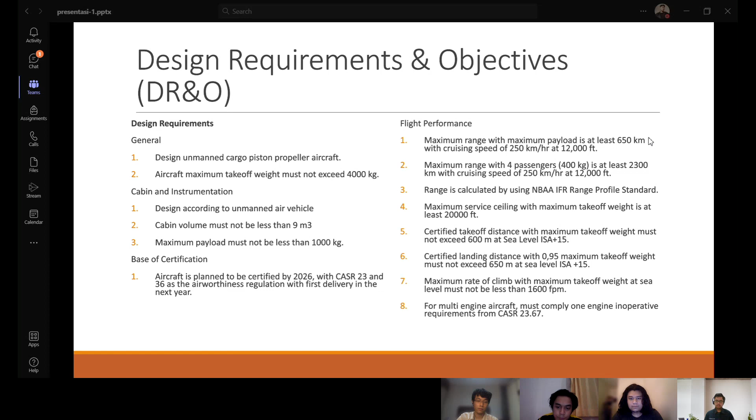It's planned to be certified by 2026, with CASR 23 and 36 as its airworthiness regulation. And on the right side of the screen, you can see several criteria for its flight performance. There's a range, a maximum service ceiling, a takeoff and landing distance, and a maximum rate of climb. And for a multi-engine aircraft, it must comply with the one engine inoperative requirement from CASR 23.67. However, it's worth noting that the aircraft that we've designed consists of one engine only. So that criteria doesn't really apply in our case.

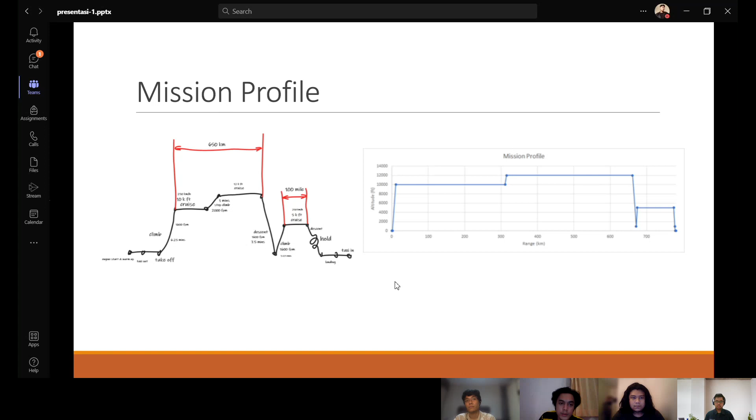So this is the mission profile, or at least one of the options. It would start to climb as soon as takeoff until it reaches 10,000 feet, and it will cruise for 250 kilometers, at which point somewhere in the middle it will start to do a step climb for a minute at 2,000 FPM, and it will then cruise again at 12,000 feet at 250 kilometers per hour, and it will start to descend at 1,600 FPM and climb again at 1,600 FPM until it will cruise at 5,000 feet, 250 kilometers per hour for around 100 miles until it descends and lands at the landing zone.

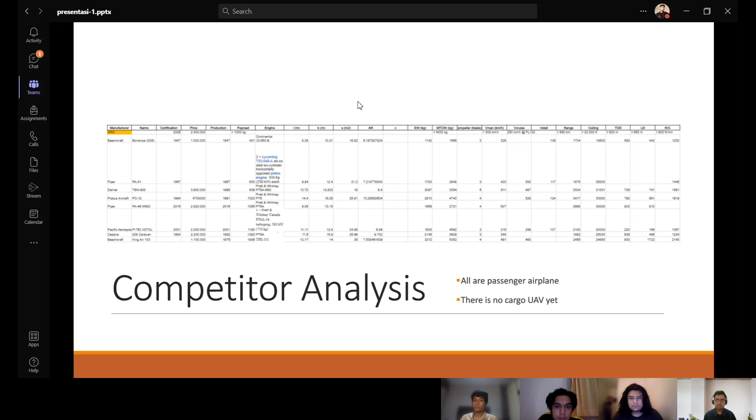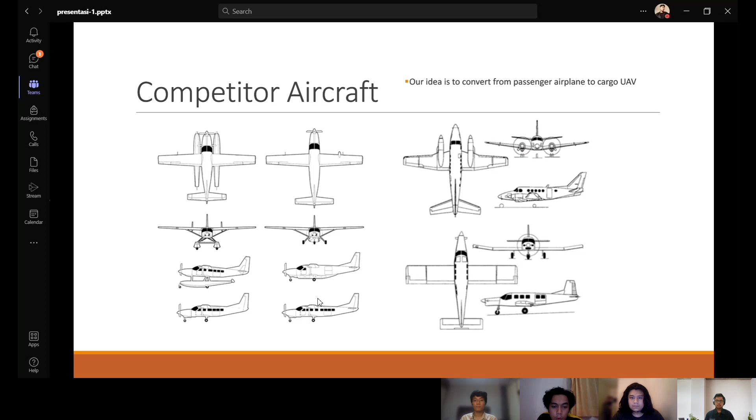These are the diagrams for the competitors, and maybe for ours there won't be any windows because there are no passengers, but this is just for your information. And for the aircraft configuration concept, Bayu can take over for me.

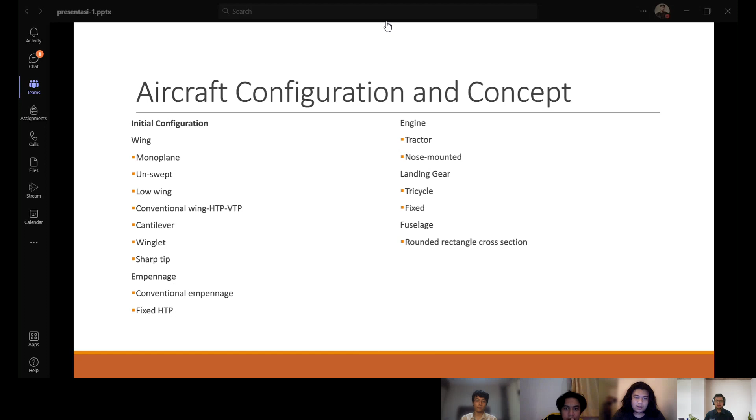Hello. Okay, for the aircraft configuration and concept, the initial configuration of our aircraft is a monoplane aircraft with an unswept wing and a low wing location. It uses a conventional wing, HTP and VTP. The wing is also cantilever. We will try to apply the use of winglets and a sharp tip. The empennage is conventional with a fixed horizontal tailplane. The engine is tractor, which means that it's in the front, and it is also nose mounted. The landing gear is tricycle and fixed. The fuselage is also rounded rectangle cross section.

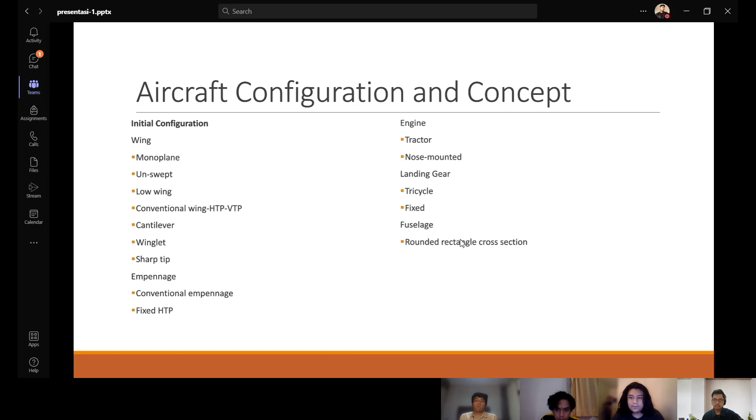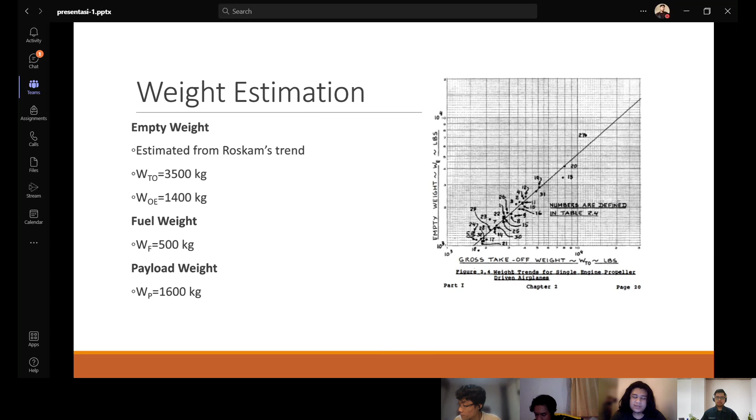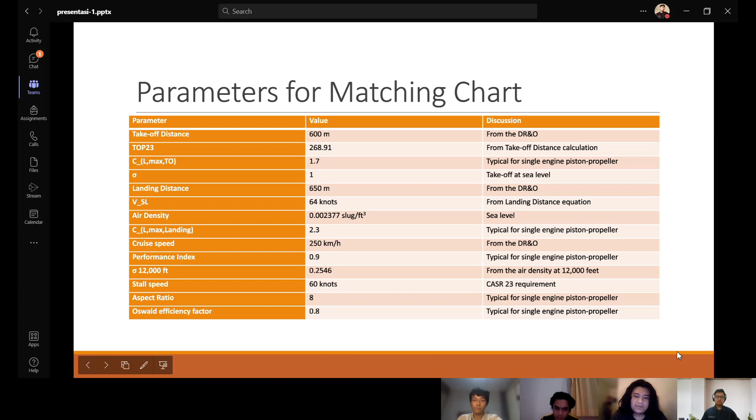And then Fahmi can continue. All right, thank you, Bayu.

So this is the result of our constructed matching chart. Based on the region that complies with the requirements, our design point will be a wing loading of 1300 Newtons per square meter and a power loading of 10 kilograms per kilowatt. This matching chart consists of takeoff constraint, landing, cruise speed, stall speed, and rate of climb. And we also input the design points of our competitors in the matching chart. Next, please.

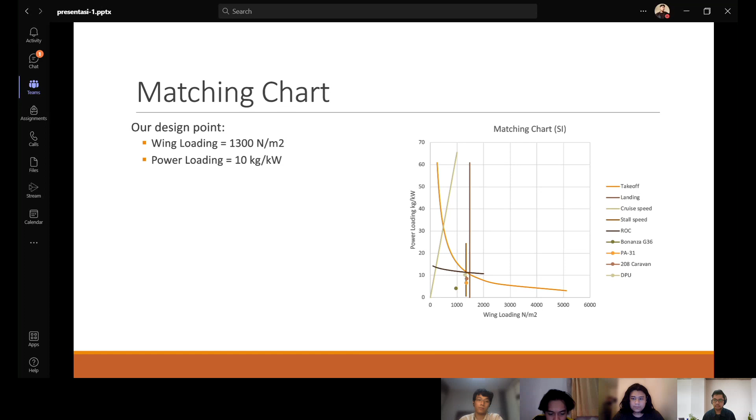These are some design parameters that we can obtain based on the matching chart estimation. We have the power loading and wing loading, CL max takeoff and CL max landing, and we can obtain the wing reference area and the installed engine power. We will discuss this in the next slide, please.

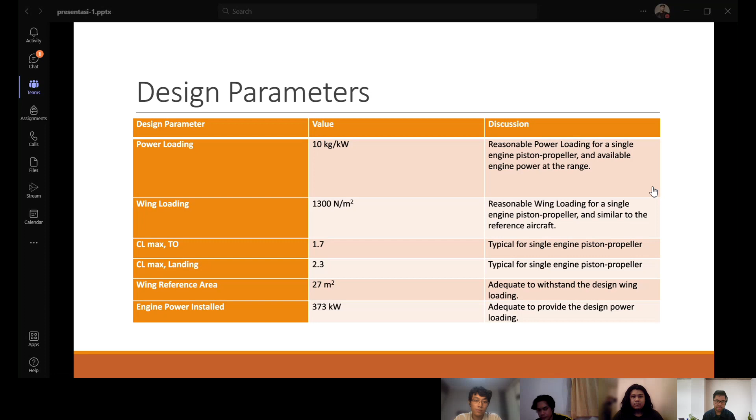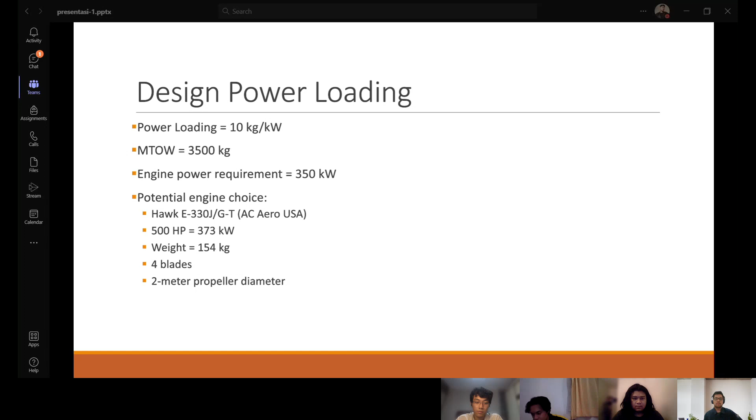Based on our design power loading and maximum takeoff weight, we should have an engine power requirement of 350 kilowatts. Our engine choice is the Hawk E-330J/G-T by AC Aero USA with 500 horsepower, or 373 kilowatts. The weight is 154 kilograms, and we will have 4 blades with a 2 meter propeller diameter. Next, please.

These are some specifications of the Hawk E330, and the dimensions will not exceed 72 centimeters in length, height, and width. Next, please.

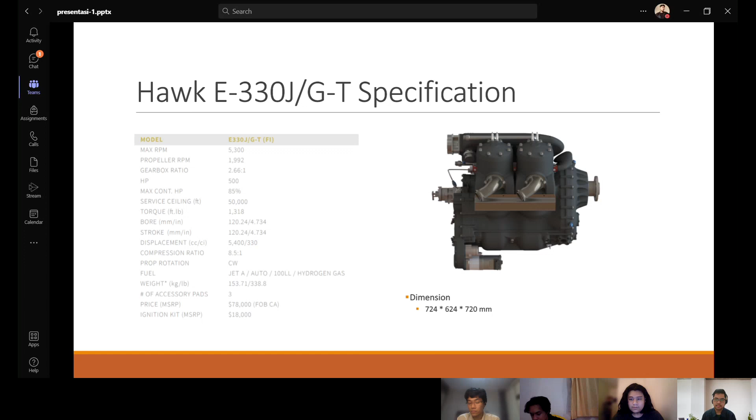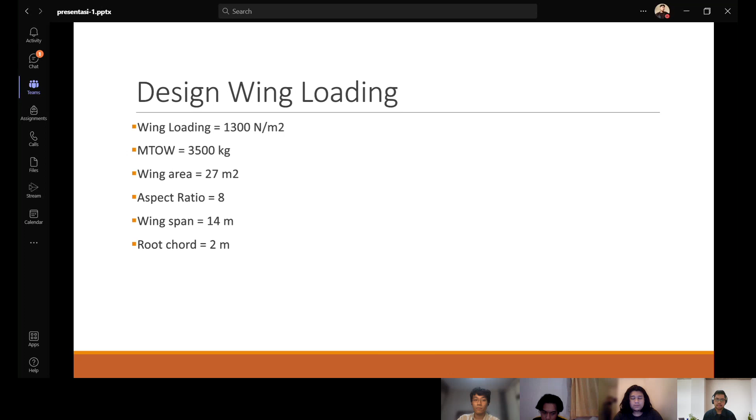And the next one is our design wing loading. Based on our design wing loading and maximum takeoff weight, we should have a wing area of 27 square meters with an aspect ratio of 8, a wingspan of 14 meters, and a root chord of around 2 meters. Next, please. And the next part will be presented by Kerry.

Okay, thank you, Fahmi. So now we go to the fuselage. For the fuselage cross section, our width will be 1.8 meters with a corner radius of 0.35 meters and a clean cross section area of 2.5 square meters. Our cargo room will have a length of 4 meters with a volume of 10 cubic meters, and our nose length will be 2.9 meters. The empennage length will be 4.6 meters, and the total fuselage length will be 12 meters.

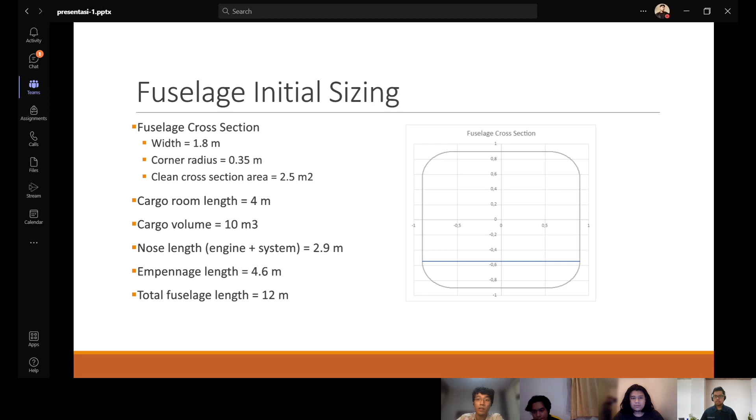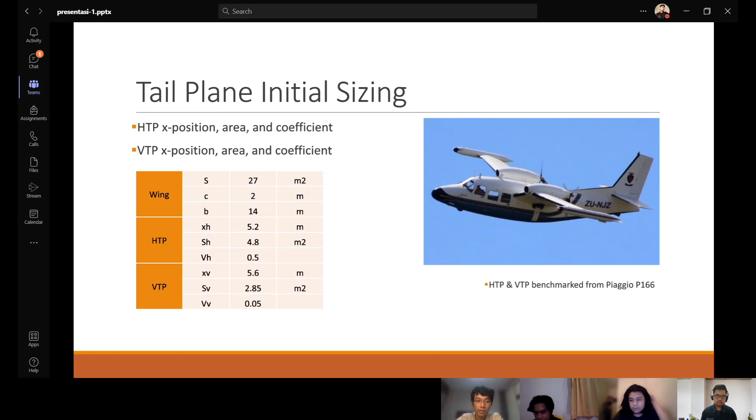Next, please. And this is our landing gear. We determined that the maximum load of the nose landing gear will be 20% of our takeoff weight, and we know that our center of gravity is 4.4 meters. Therefore, we can find the positions of our nose landing gear and main landing gear, which are 1.4 for the nose one and 4.95 for the main landing gear.